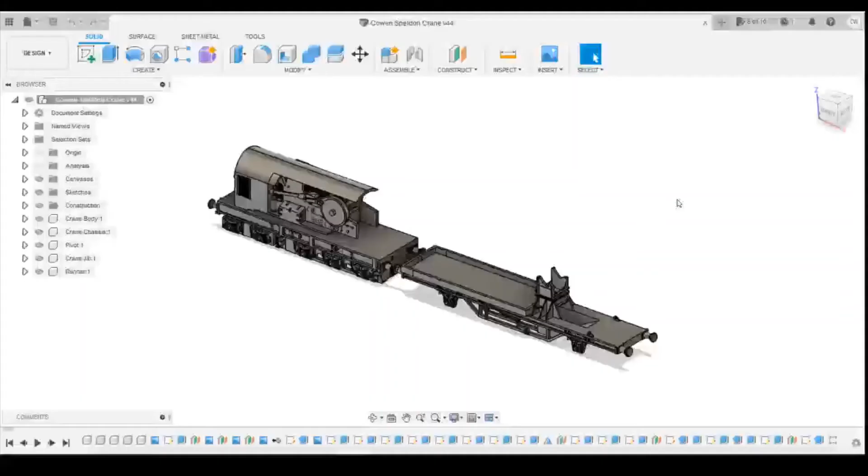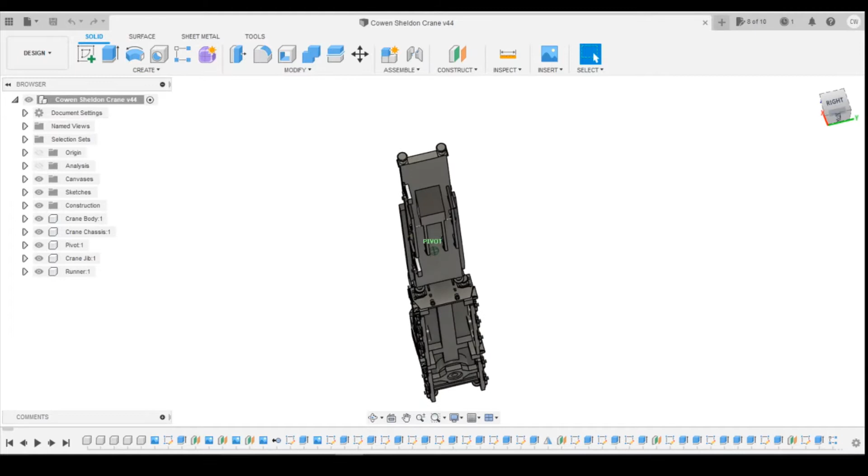In the last lesson, we drew the handbrake system here, and when we were doing that, what I noticed was the width of the wagon was significantly narrower than the crane, and I thought I better check what the spacing is going to be like on the underframe, specifically looking to get the axles in. Again, we might have to make that compromise to make it wider so that we can fit the axles in. So let's have a look underneath the wagon and see what we can do to change things.

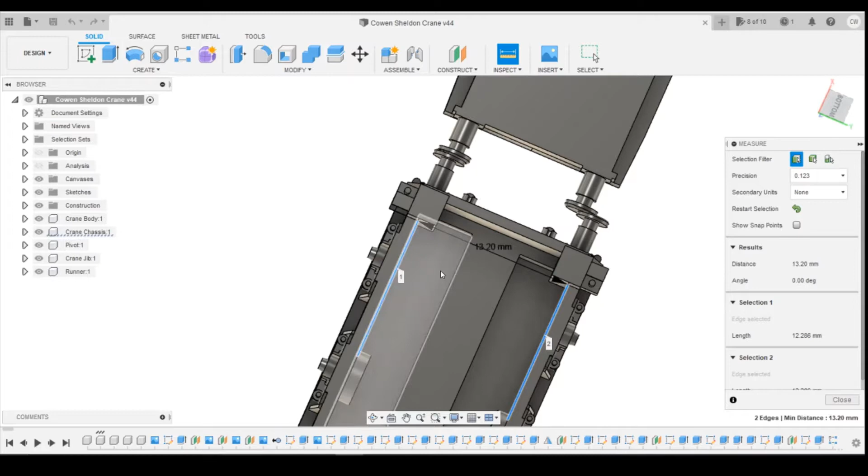Okay, so if we have a look underneath, let's look under the main body of the crane here, and we look at the distance between frames. So we're using the inspect tool, select the line on both sides,

and that's telling us we've got 13.2 millimeters across the width of the wagon, across width of the chassis. So if we have a look at the runner, first of all we're going to have to mirror over the W-irons. So select the jib runner on the radio button here, and then we'll come down, find the bodies, and then we'll mirror those.

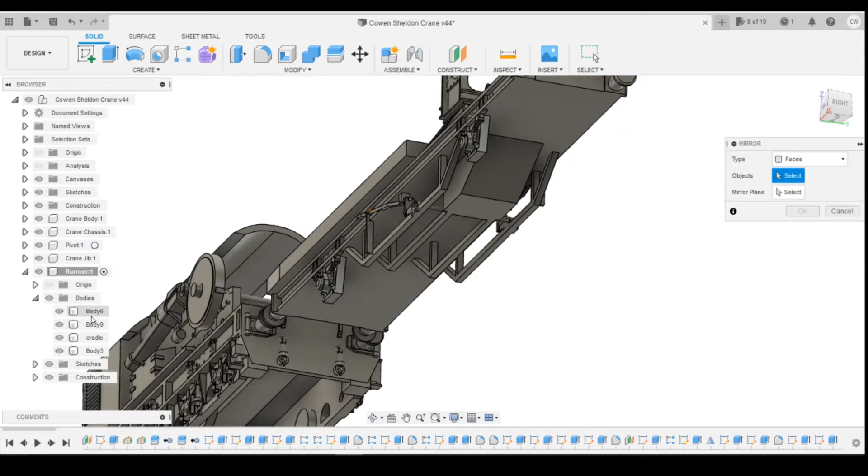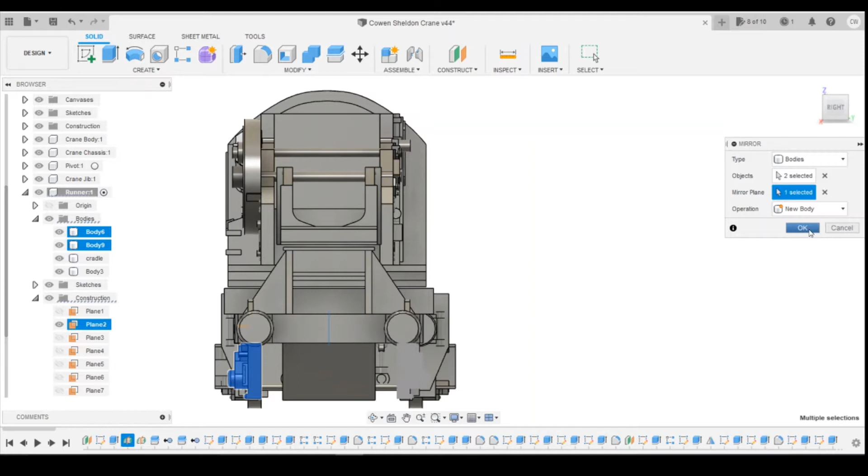Change the bodies, so using mirror tool, that's that body and that body. So we're selecting bodies 6 and 9, and I'm going to use the mirror plane, which we've already got a midpoint plane. Just find that one. Yeah, that one there. So plane 2 is our mid plane. We're just using it as a new body at the moment, so it's creating 2 more W-irons.

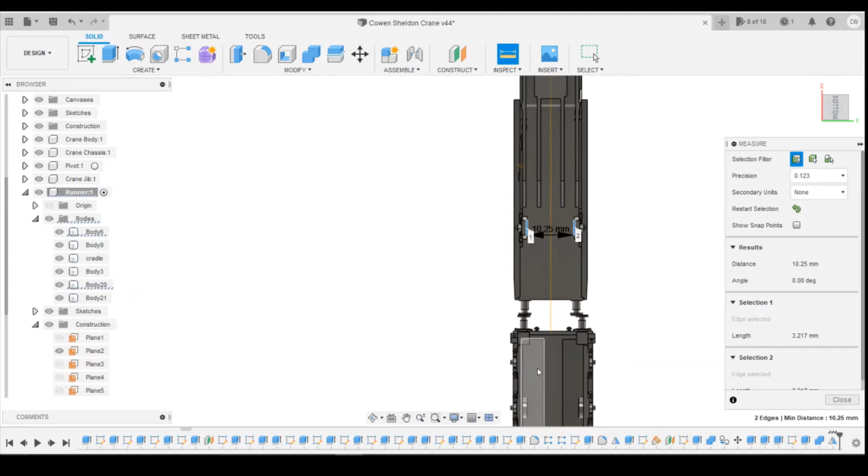Okay, now if we inspect the distance between these two, so that inner surface line, we're at 10.25. So we do need to increase that by 3 millimeters. What we might find now is, as we do this, we might find that it starts to create errors or misshapes. We might have to kind of change. So if we try it, see what happens, and then work from there onwards.

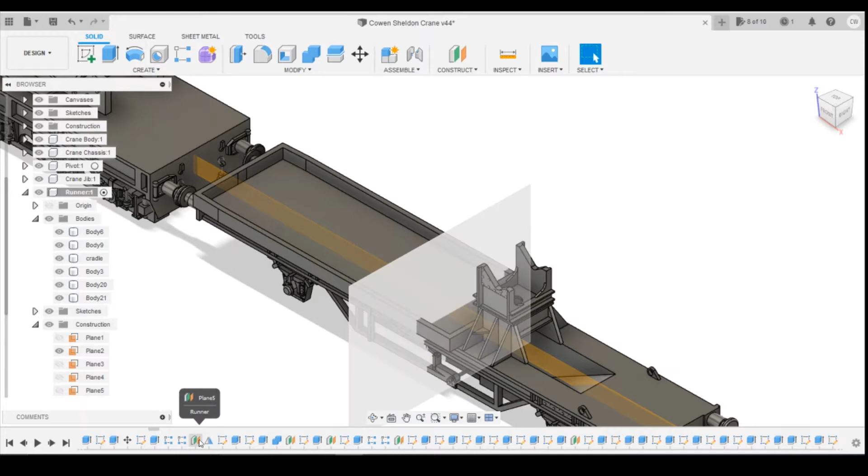Okay, so if we go back before the mirror point for the main body, I'm just scrolling through here looking for the correct mirror plane. That one there, I think. So if I roll back to here, yeah, that's correct.

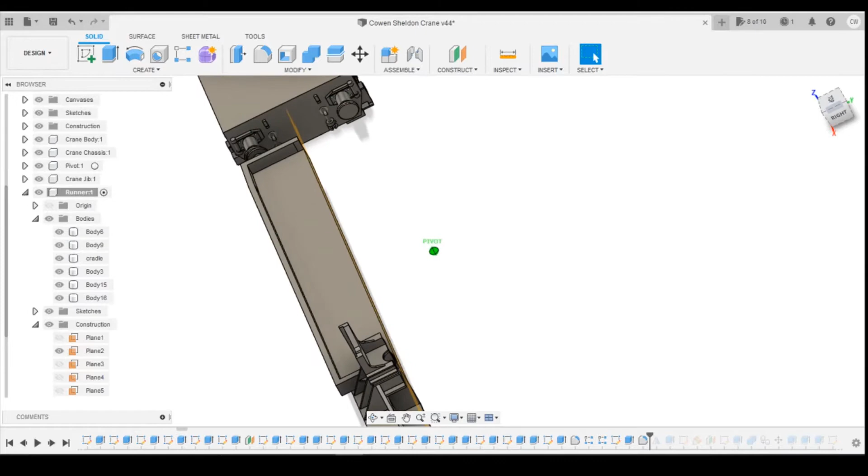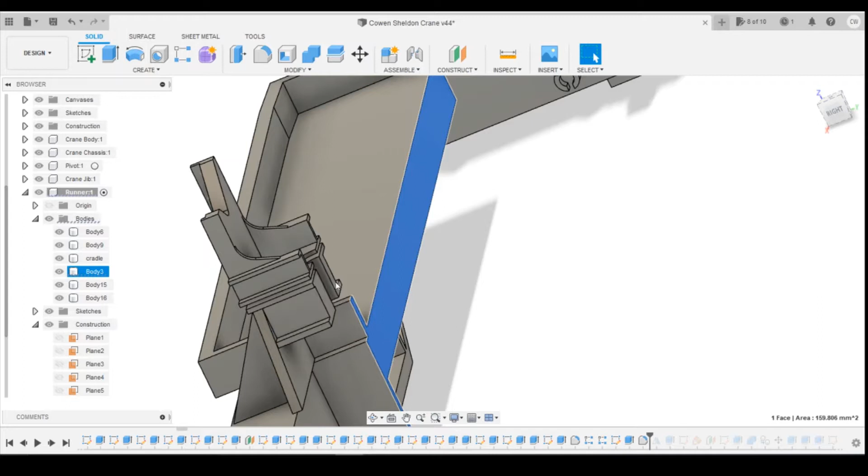Okay, so hopefully, fingers crossed, this is just going to mirror quite simply for us. So if we turn that mirror plane off for the moment, we're going to look to increase, hopefully if we just select all the surfaces here, like that, and we do extrude. We said we needed 3 millimeters, so we're going to extrude this by 1.5 millimeters.

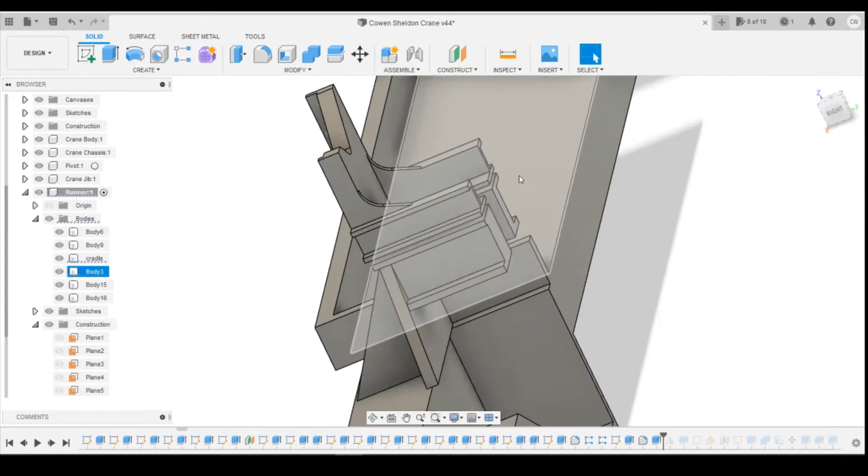Click on OK, and then start to skip forwards to the end. We'll see if it's created any errors. Doesn't look like it. And the reason it probably hasn't is because we were using the mid plane here.

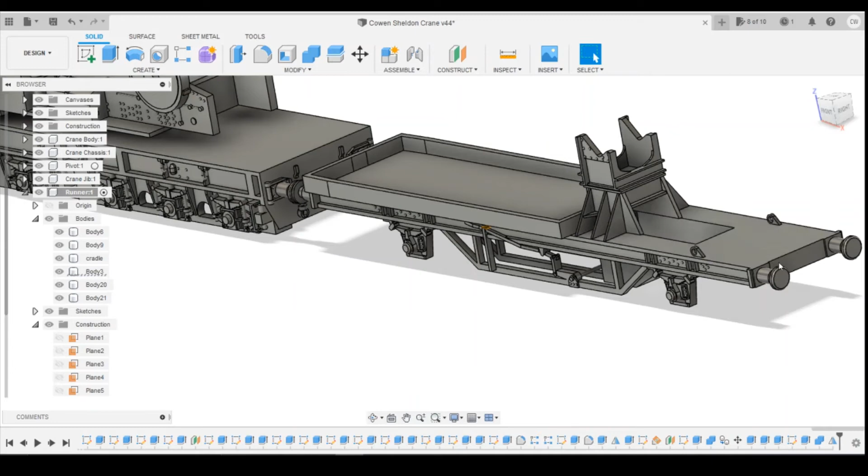Check underneath. Everything looks like it's lined up here and here. That's good. So if we inspect this now, hopefully we should have 13.2. No, it's still 10.5. So let's have a look what's not worked.

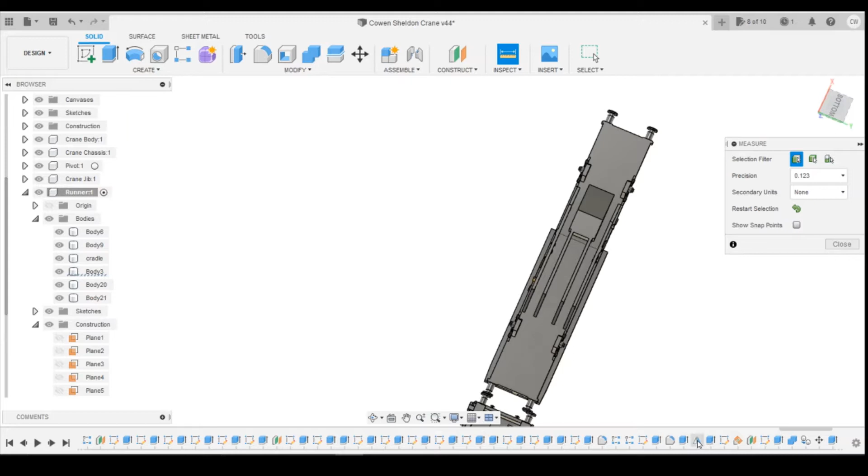That one there. Let's have a look. We will history mark it here. I'll edit the feature here, and it probably just means, yeah, the missing plane here. So if we select this missing plane on the inside here, okay.

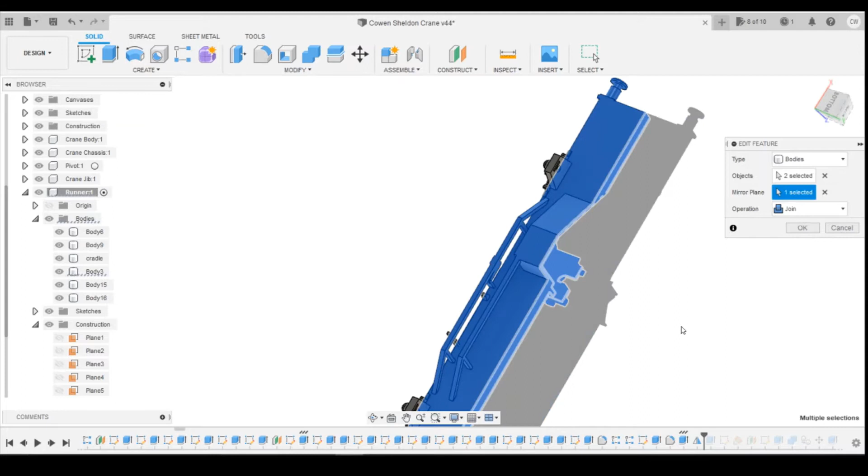Again, we may have to check, see what errors, if any, we get. How does it look at the top? Okay, so it doesn't look like there's any errors that are standing out underneath.

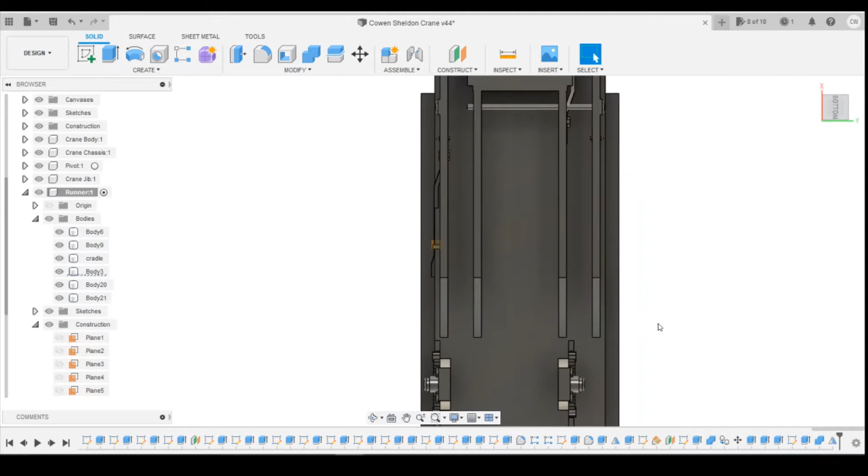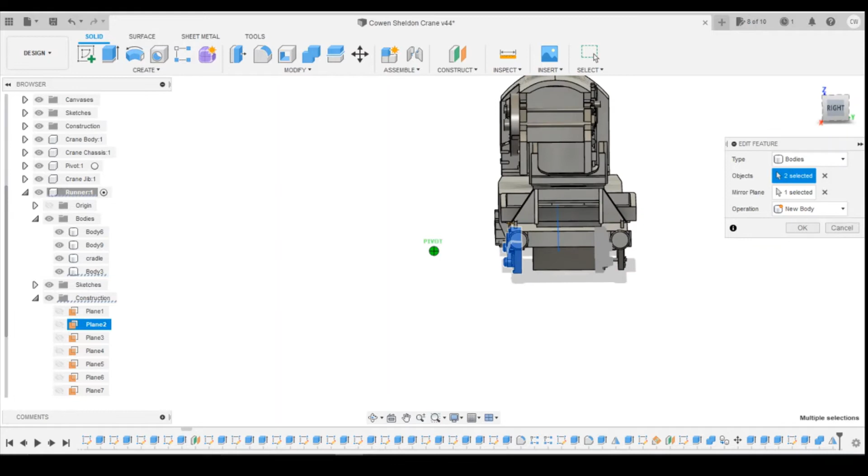Okay, so we've got the mirror plane on the, so that midpoint plane hasn't moved for some reason. It's odd because we created it as a midpoint. That is odd because everything else is mirrored across.

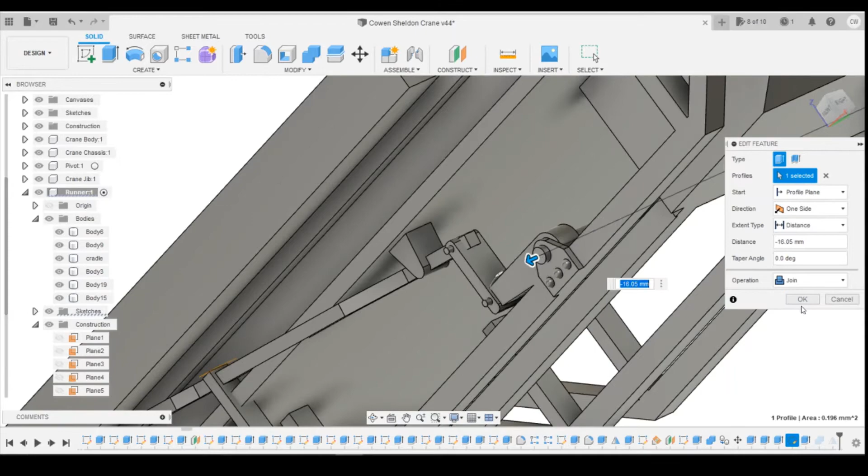Okay, that hasn't come all the way across, so we'll have to go back and change that. That one. Okay, so let's create a mid-plane, because for some reason it doesn't seem like we've got that as a mid-plane.

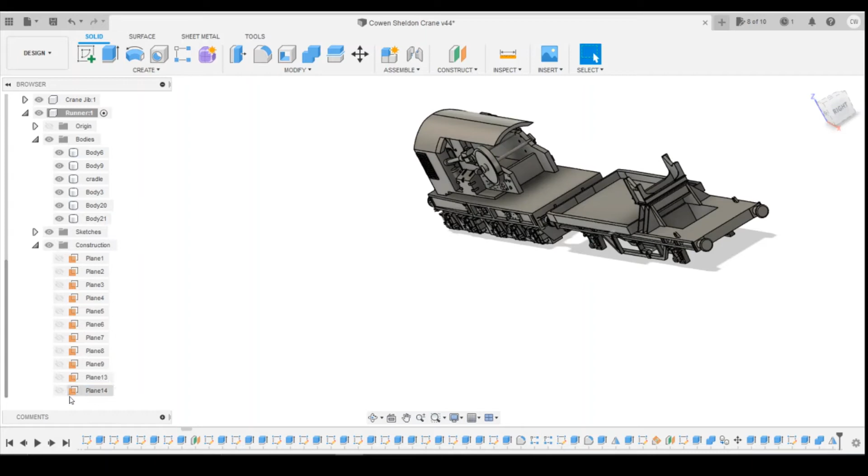Okay, so mid-plane between that surface, that surface. 15, good. We might need to come back there.

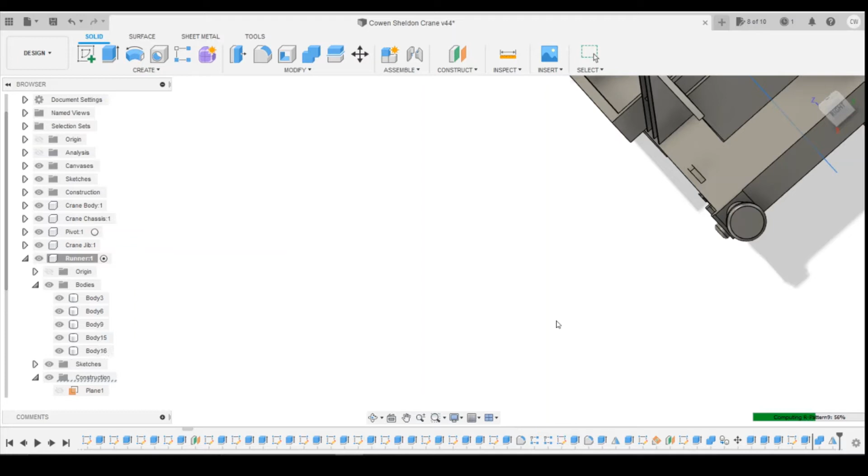Not sure what happened there. So all I did was move the mid-plane, so it's deleted it for some reason. Or hidden it. Let's undo that.

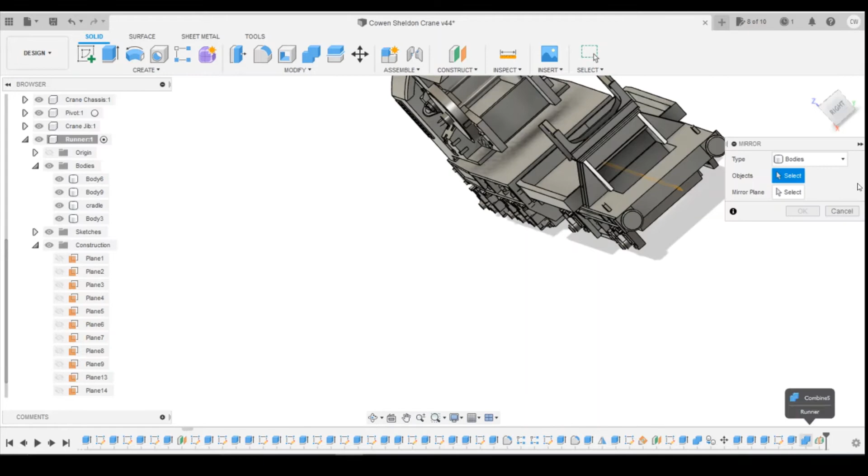We delete the mirror of the bogies, and then we'll redo that. Select the bodies we want to do. So select that one, and on the mid plane, which was 15.

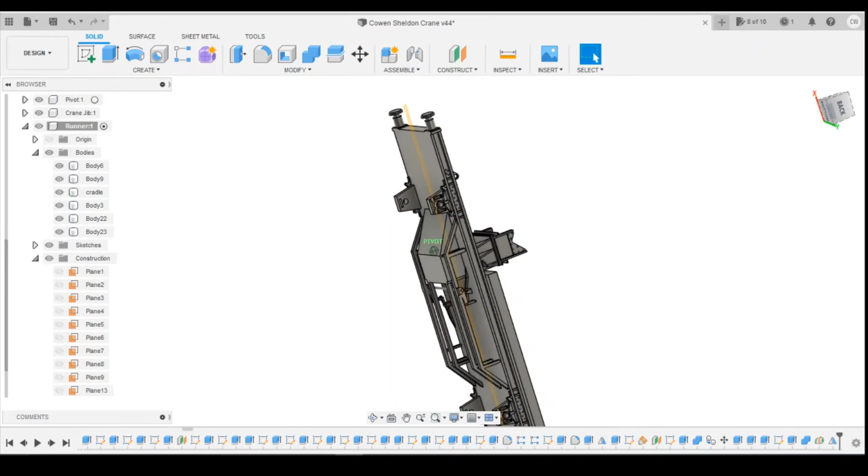Okay, see how the handbrake is not mirrored over properly, so we may need to look at doing that as well.

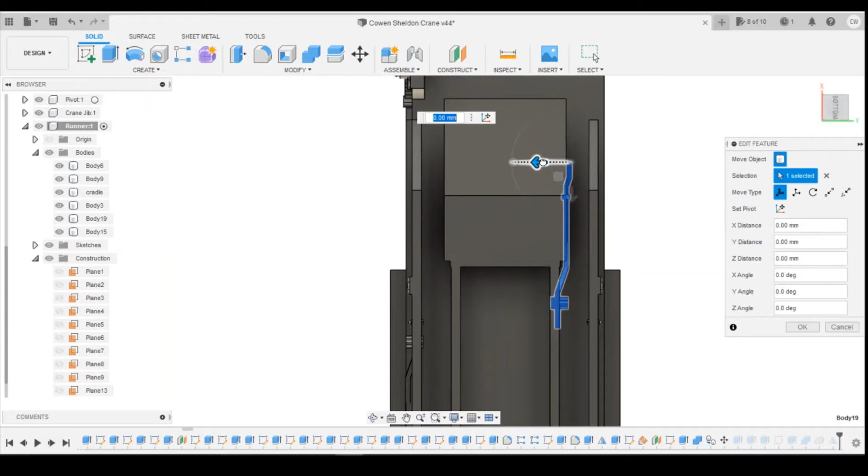So realistically, if we moved everything over 3mm, we should have to just move this over 3mm and it be in the same place as it should be. Yes, it looks like that is.

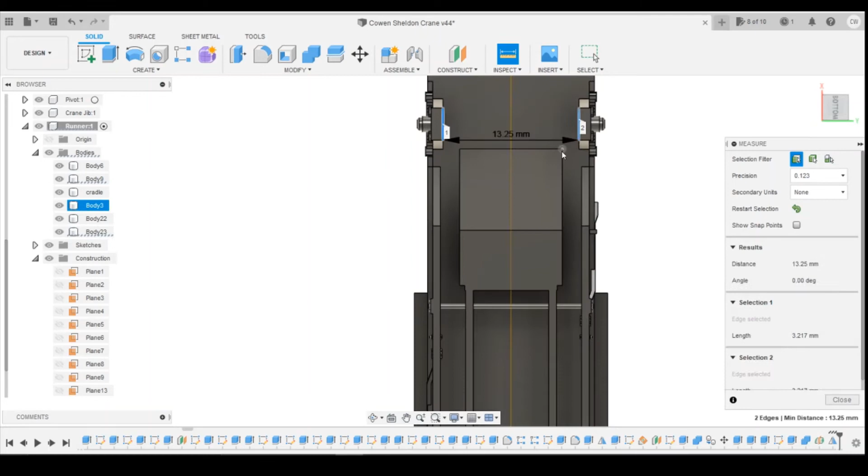And we can inspect these just to make sure 13.25 is good. Okay, so you see how we've had to make a compromise there, just so that we can get the axle in there. That has made it look really, really wide on the buffers here.

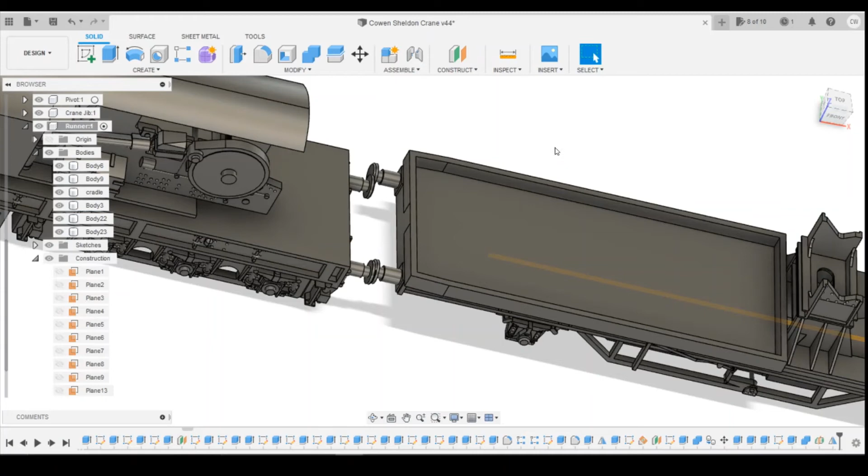So we may have to do something with the buffers to move them inbound slightly. Yeah, it's all about compromise really.

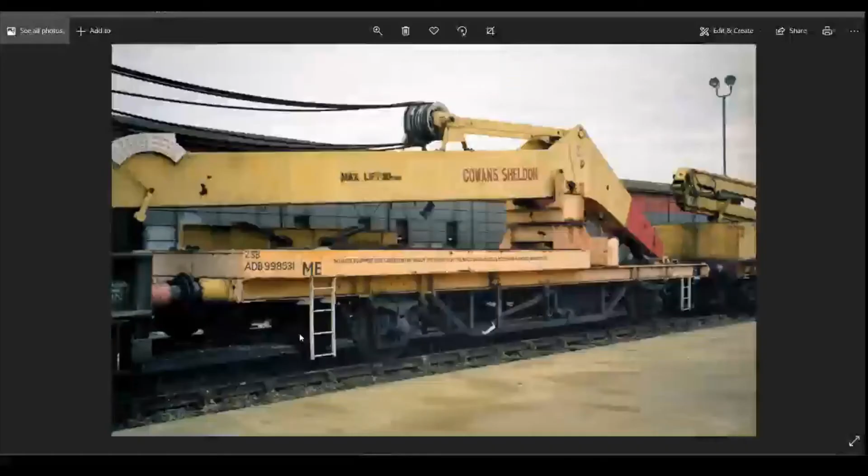Okay, so if we compare the buffers to the photo here, and then compare it to what we've got, we could definitely move ours inbound and it still match up with the photo, okay?

So I think I'm going to do that and look at changing the, switch off the pins there. We change the buffer, so we're going to have to come back through the history here.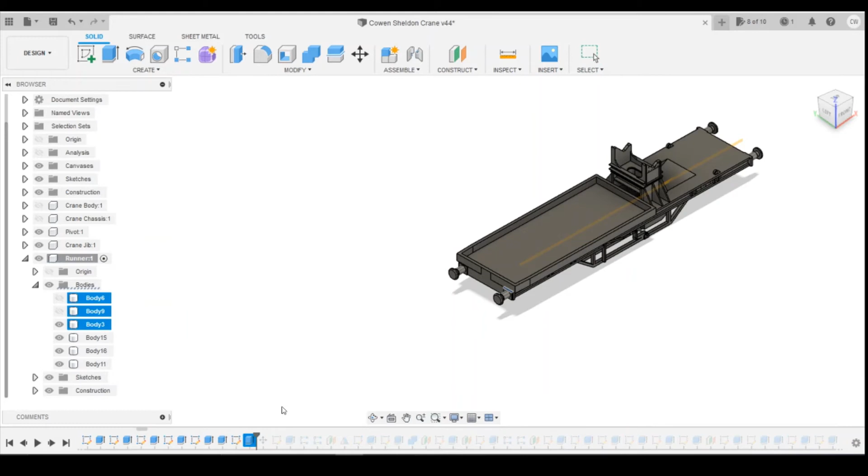Roll the history back here. Buffers are still there, so probably going to have to come back in further. So all I'm going to do now is just keep rolling the history back until I get to the point where the buffers are there. I think it's going to be somewhere down here.

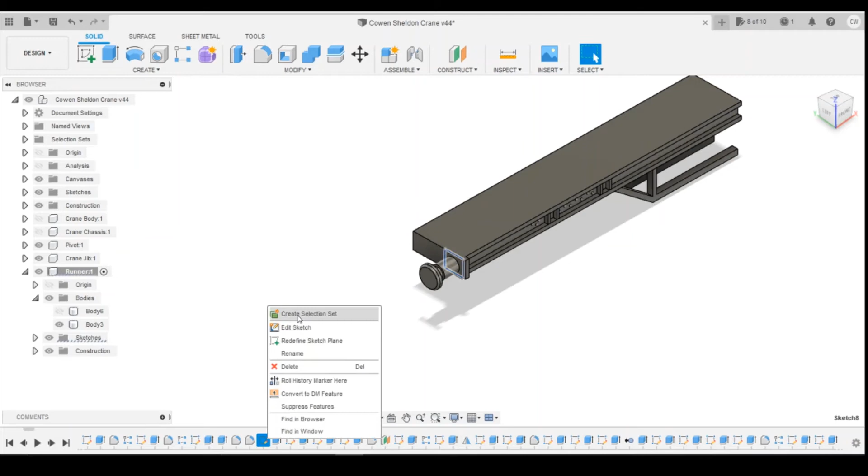Okay, so what I'm going to do is move this all inbound slightly. So I'll come back to the sketch, which is down here by these two fillets. I'm going to move this inbound, 0.75 millimeters. Click on OK.

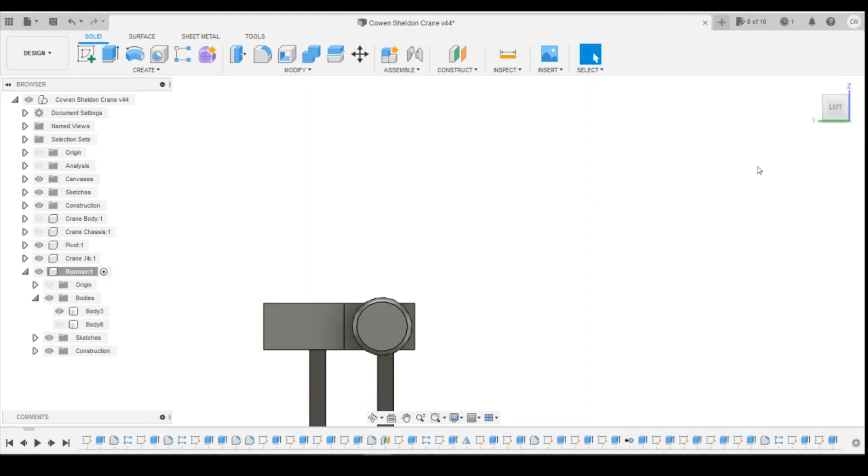Okay, and as you can see now, this wasn't fully defined properly, so we're going to have to edit the sketch on this. There you go, you can see it's not there.

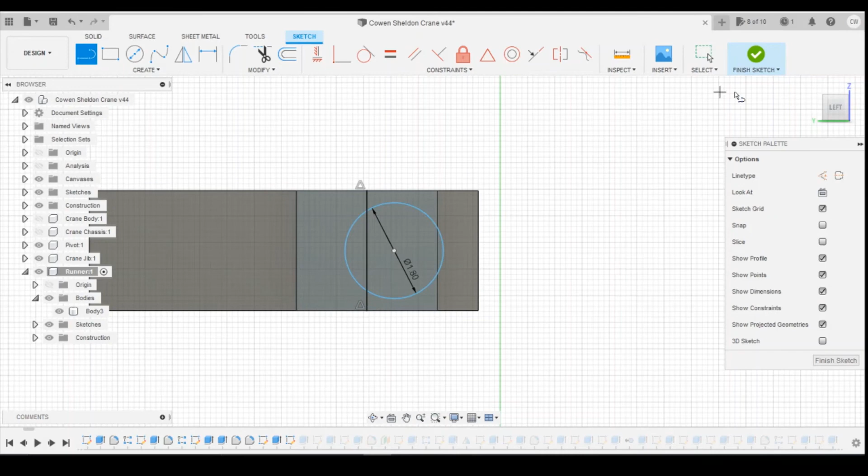So if we find a midpoint line, we can draw on there. Line down a midpoint, like that. Just turn that into a construction line. And then we can drag this across to it, snap it onto it.

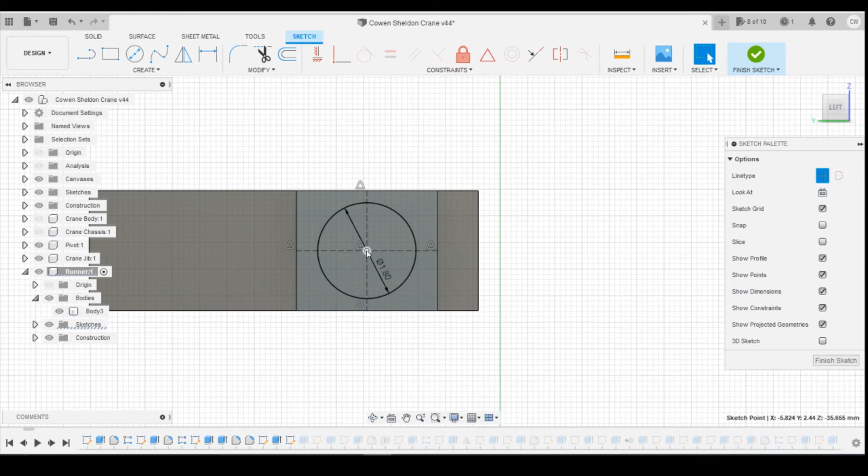And then we're going to want another midpoint line going across there. That's already snapped in, that's fine. So now if we click on OK, yeah, that's moved the buffer inbound.

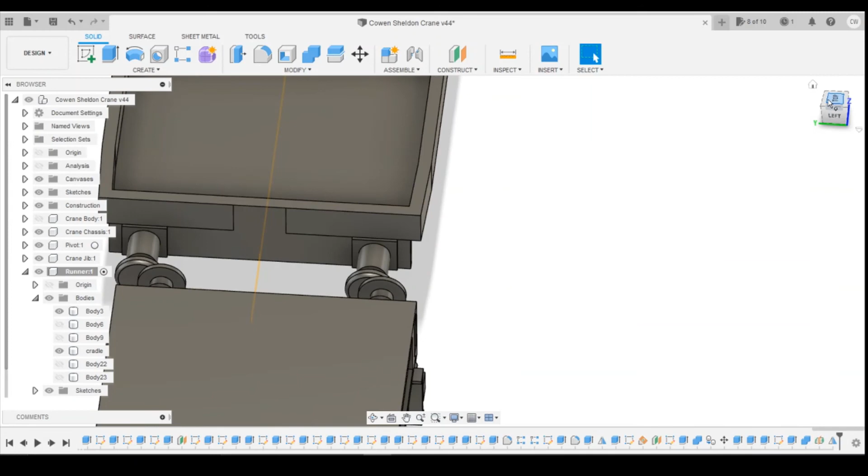Hopefully if we skip to the end now, and then if we bring the crane chassis in, hopefully the buffers will line up a little bit better. Yes, they're offset because the whole wagon's offset, but you can see that it is definitely lined up better. Slightly more gap on this side.

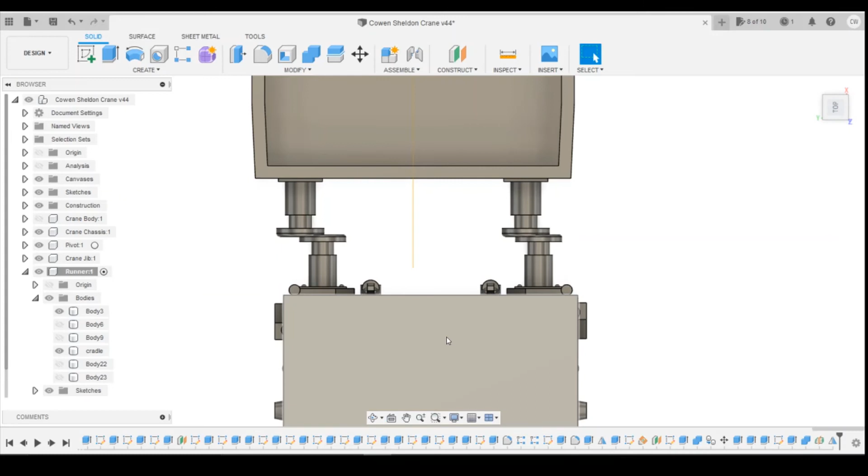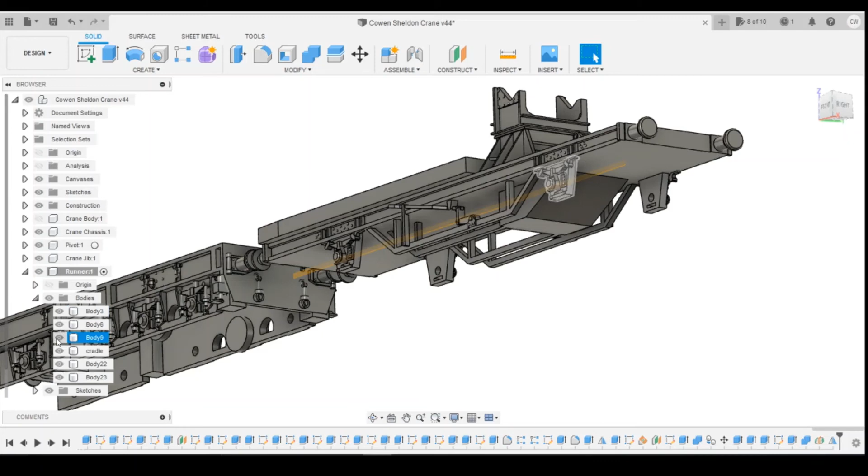And it's going to be, we're looking at maybe a quarter millimeter difference. You're not going to notice that really. Okay, so I'm much happier with that. I think now that we've checked that, we've got the W-irons here with enough room to get the axle in.

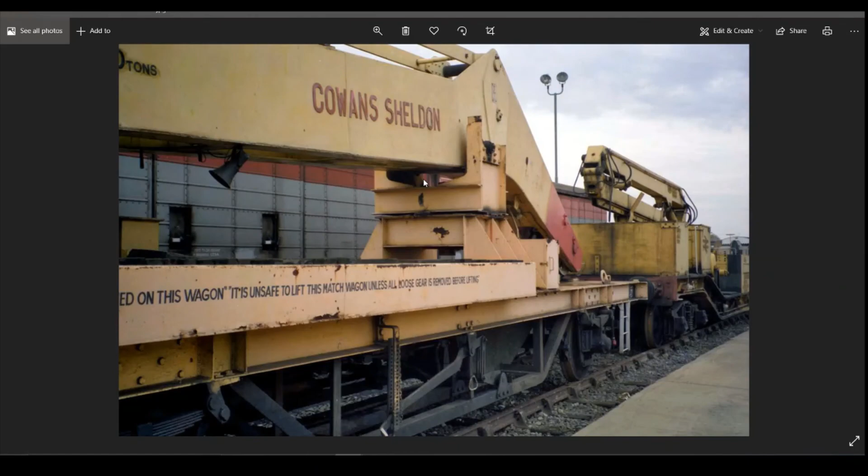One thing we might want to look at is potentially looking at these two drop downs here, because they're definitely closer in the middle. So I might go back and change these slightly.

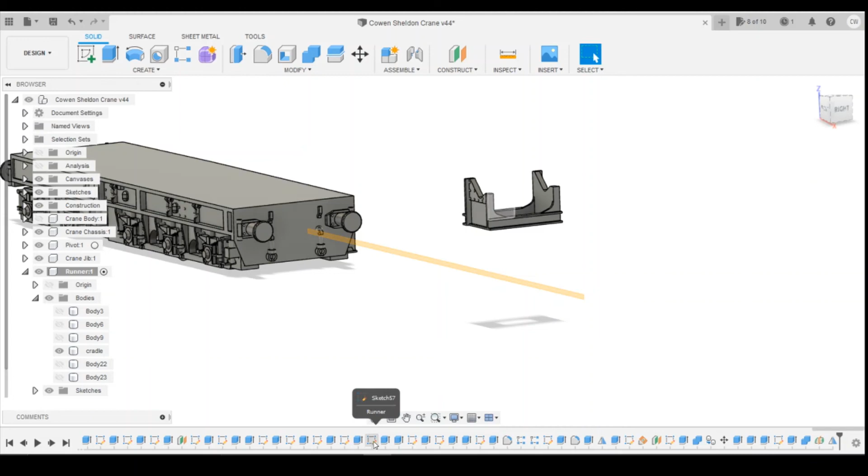So if we look at the cradle, turn everything else off but the cradle. This bit here.

Okay, I'm going to change that to 0.25 there, which has brought that in slightly more.

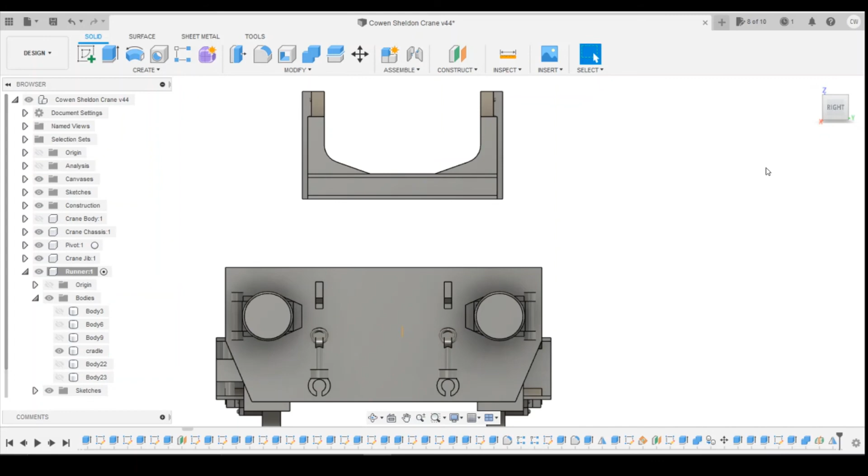Okay, right, I'm feeling good about where we're at at the moment. That's the changes I would suggest making to the jib runner here, just to get the axle in.

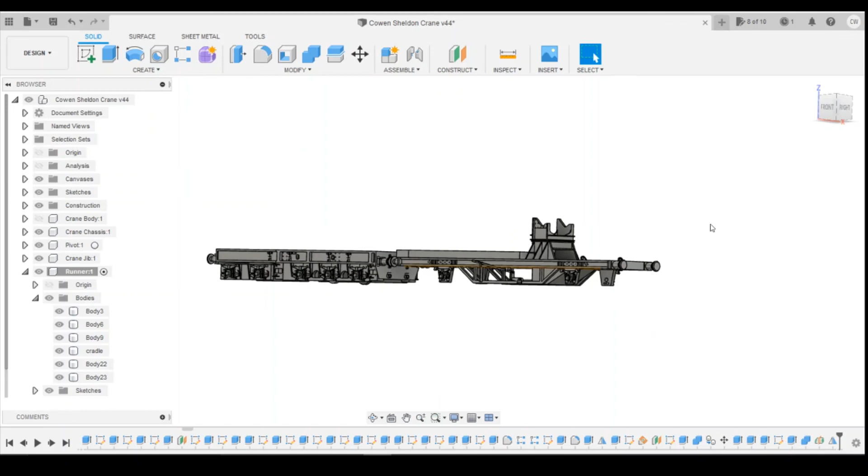I know there are some axles that you can get that are shorter, but you're still going to need to have the space for the track gauge. So the biggest difference on those shorter axles is the length of the pinpoint, rather than the space in the wheel, obviously. So you're going to need to have that.

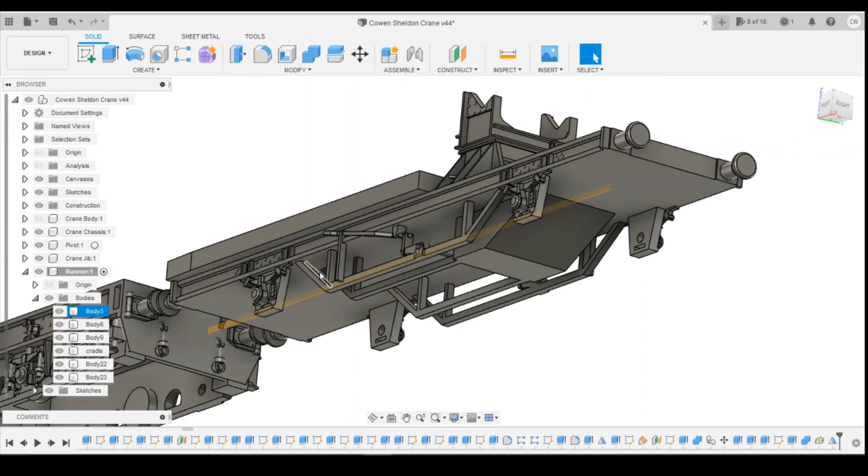I've just gone and measured some Farish wagons as well, and now our distance across the wagon actually matches those closer. Before we had it quite narrow compared to some of the Farish wagons, so it's not going to stand out, it's not going to be looking like it's massively wide or anything. It's going to be there or thereabouts with the distance. So that would be the changes I'd make.